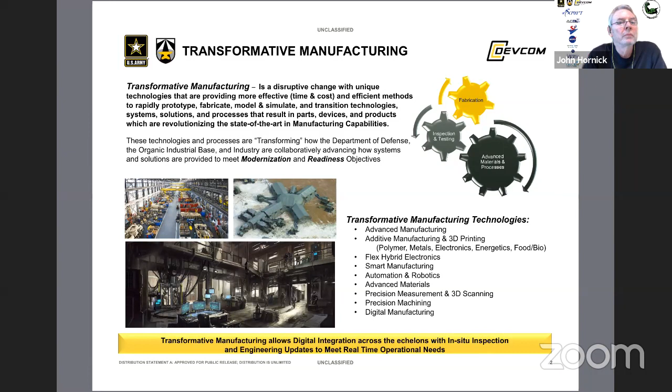So the Army, under the Army Futures Command, has what they call the 31+3, but basically 31 signature efforts, and transformative manufacturing touches upon all these major programs. It's how the Army is really going to get itself to the future level. By transforming all these technologies and using these new advanced manufacturing approaches, we can enhance and enable technologies to meet these priorities. It's up to us, DoD, industry, and academia, to work together, use best practices, and bring the Army prepared for the future battles.

At the Armament Center, we have full advanced research all the way through demilitarization, so full life cycle responsibility, from design to testing, qualification, certification, the whole aspect. And we work on 4 of the 5 major AM domains: printed electronics, metals, polymers, energetics, and the other domain is chem bio food. But 4 of those domains are done at the Armament Center, and truly integrating and using hybrid manufacturing techniques to integrate electronics to make 3D electronics into structures is one of the main areas we're really focusing on.

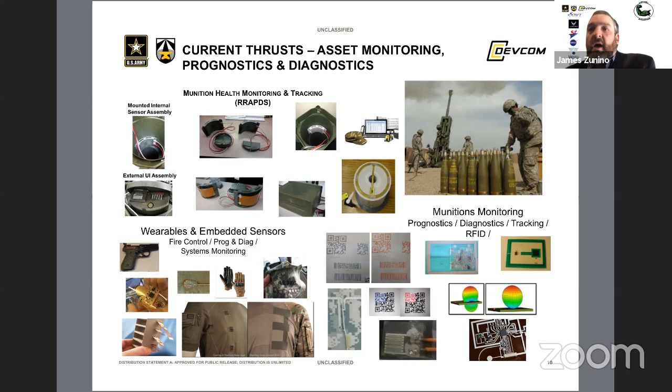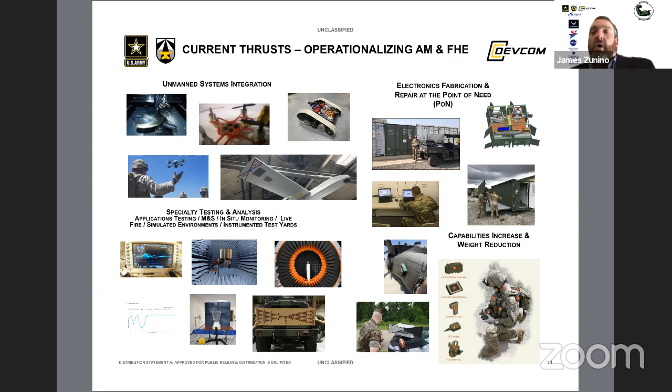One thing we're always doing at the Army's Futures Command, and especially at CCDC Armament Center, is we're looking for strategic partners, transitioning ideas, getting ideas from industry and academia, and enabling this acceleration and transition. We have a lot of active cooperative research and development agreements, educational and partnership agreements, and we're constantly trying to work together to build the best thing and really be a whole family that takes all these manufacturing technologies across the US and integrates them for DoD applications.

In summary, through manufacturing, advanced capabilities can be added to our current systems. Until we can print everything, hybrid fabrication is required. A lot of us say print what you can, place what you can't. By partnering in transition with the other services and OIB, we can support our warfighters at home and abroad.

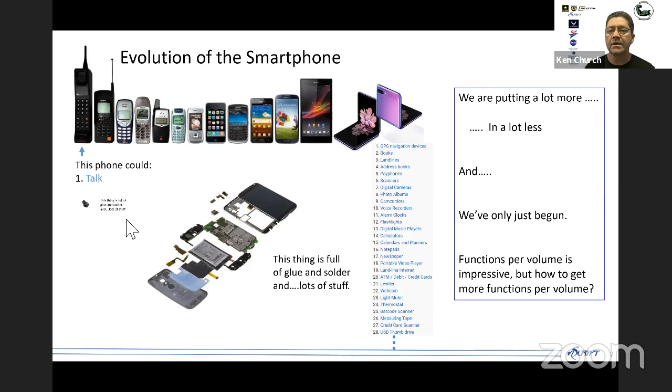And then if you look at the bullet points over to the left hand over here, you see that little bullet point - that's not a bullet point, that's an earbud. And this earbud does what this thing does. It talks, and so you can listen. And this is also full of glue and solder and lots of stuff, but just at a much, much smaller scale. And that's really where it went. So electronics is going to a much, much smaller scale.

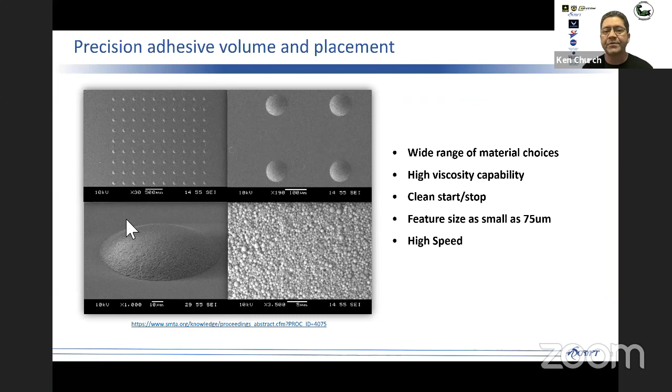And this is where precision really became important. So as electronics today, where does printing happen today? Well, it happens right here in printed adhesives. That's an important concept to get a hold of. It happens in printed solders, also important.

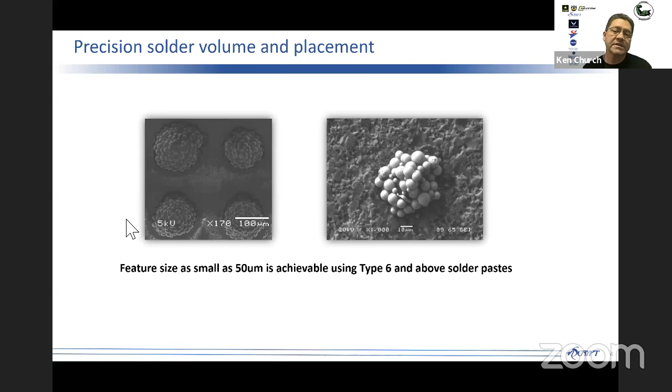So what you want to do is make those smaller. The printed adhesives, you can see those are less than 100 micron dots, and you want that consistent. Printed solder, again, less than 100 micron dots, and you want that consistent.

And then it's moved to printed antennas. Printed antennas are interesting, and most people are familiar with LDS, laser direct structuring. You have a special plastic, and wherever you pattern with that laser, you then go back and electroplate that copper pattern on.

The advantage of printing, on the other hand, has a couple. One, you can now change substrates. Whatever substrate you want to do, you can then print on, and that gives you some advantages, but it also can give you an advantage in cost. So printed antennas are also moving in a direction and becoming very real as well.

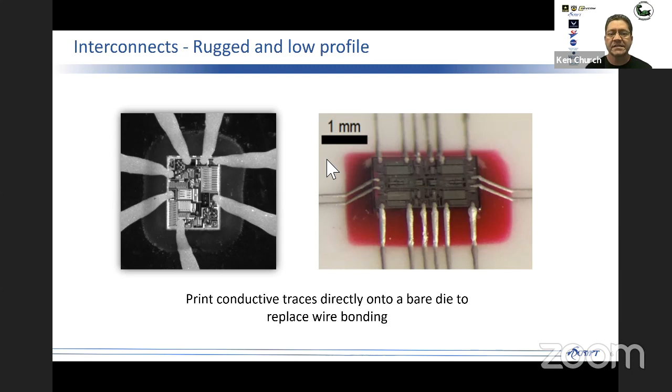And then also moving toward printed conductors, and the printed conductors become very important as they start doing such things as printing directly to the pads of bare die. The idea behind that, and this is happening today, is it's low profile, but it's also a more rugged approach. So this has some benefactors in that as well.

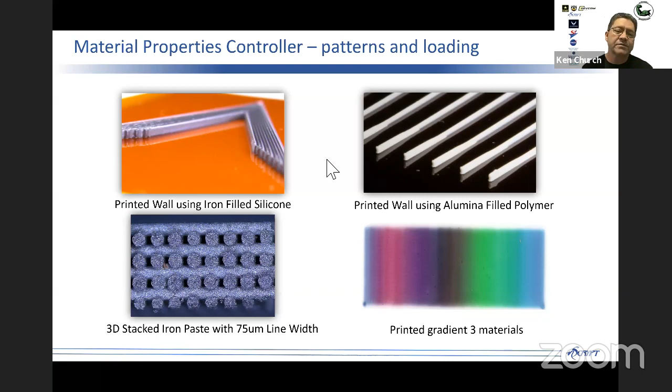So what can we do with this? That's what's really interesting. We can do some loading on the materials through nano and micro, or we can also change material properties through macro and milli patterning. And that is also sort of a 3D process.

And where does it lead to? Via filling, printed resistors, sensors, antennas, a doubly curved surface. And doubly curved to me is like a basketball. That is doubly curved, a half a basketball.

A cylinder is a tube, but topographical printing, I'm not talking about maps. I'm really talking about whatever you're printing on has some sharp dips and valleys and peaks. And how do I get electronics on that? The only way we do that today is through printing. So we have that advantage.

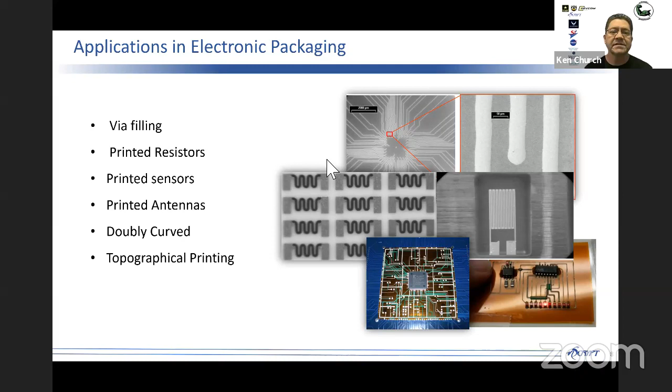So we have a toolbox of things, and those toolboxes of materials and material placement are important. And this is how we do it. We take a bunch of these devices, these tools, from micro dispensing to 3D printing, pick and place, precision, and we put those all on a single tool plate. We called this the pentahead.

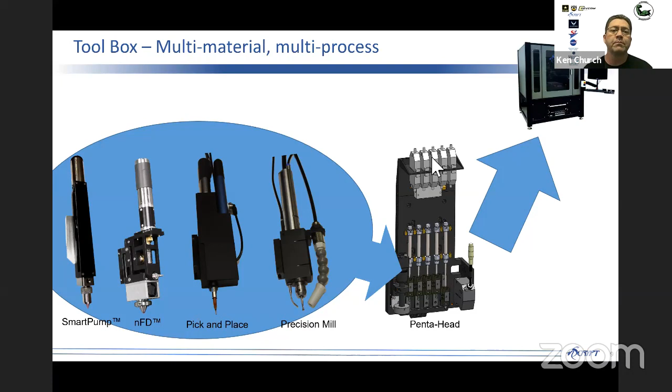And then we put this inside a single system. That system then allowed us to do multi-material, multi-process. So now our toolbox is becoming full. And what can we do with the toolbox?

Well, as we print, one of the things we should do is pay very close attention to what we're printing. I want to give a shout out to NASA here. NASA had the idea that the people on the space station were kind of busy and didn't have time to print, reprint. When you print 1,000 layers and a layer goes bad, they wanted to know what happens in each layer. So layer by layer, we can print, scan, and get a full report on every layer.

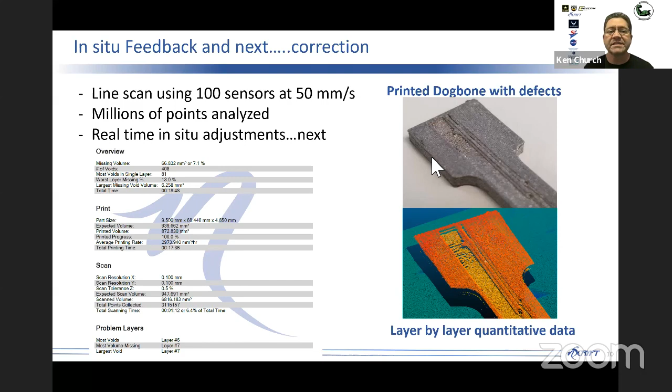This is very important, the next step of really where manufacturing is going to happen. And sort of the next step after that is print, scan, and then repair. That's going to be very interesting.

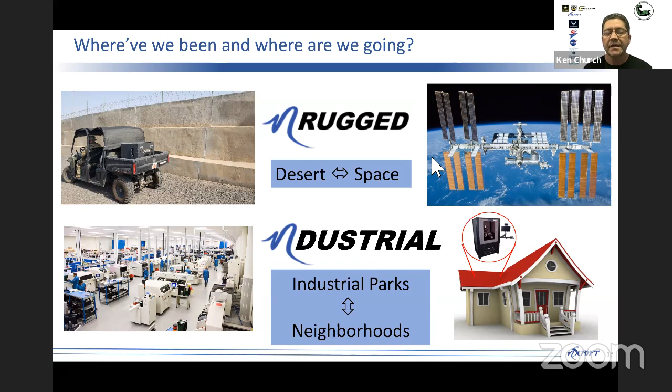So where are we at? We're in industrial parks today. Where are we going? We think we're going to neighborhoods. How real is that going to be? What a super great question, but that is the intent. So when we start looking at our partners at NASA, Air Force, Army, DARPA, all of those people, these are the people who are moving and shaking things and getting us out into places where electronics does not currently exist.

Here's where I'd really like to look, because people always ask this. They say, where exactly are we and where are we going to be in 5 years, and where are we going to be in 10 years? I like to look at it this way. You know, we have a list of things, but today, I have a pair of these Oakleys and...

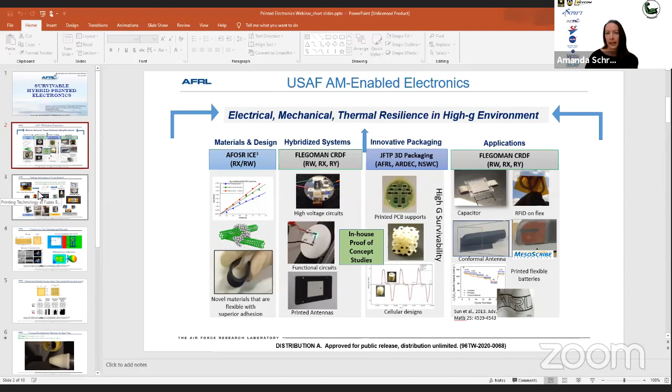As Ken said and everyone else, printed antennas has been a pretty popular area, as well as just different ways to replace potting in more elegant ways, more sophisticated or complex designs through 3D printing the structures. So we'll title that Innovative Packaging. And then the final section is more towards the applications. Just to give you a few examples, we've worked in FLEGOMAN on a printed capacitor, some different RFIDs, flexible or other printed antennas that have actually been implemented on the Reaper. Here's another example of flexible. So we don't necessarily work on flexible, but conformal is one area, and you'll see some examples of that later.

I wanted to give you a preview of what printing technology is in our lab and where we intend to go by the end of the talk. We do have traditional circuit board printing software, we use a lot of SolidWorks and Autodesk as far as our software goes. And we have some plastic printers, we don't use those a whole lot for our electronics, it's more form and fit check and prototyping, but we have a MakerBot and a Formlabs. The primary machine that we use is what Ken just described from his company, the nScrypt. So the majority of our talk will be how we've outfitted and are using the nScrypt.

We have a larger scale printer called the Beast. We had a Voxel 8, which is no longer being sold - that company's out of business. And a high temperature printer that we haven't set up yet for polyether ether ketone, otherwise known as PEEK, a high temperature polymer, and a lot of other accessories. So the lab's grown and we continue to outfit our nScrypt.

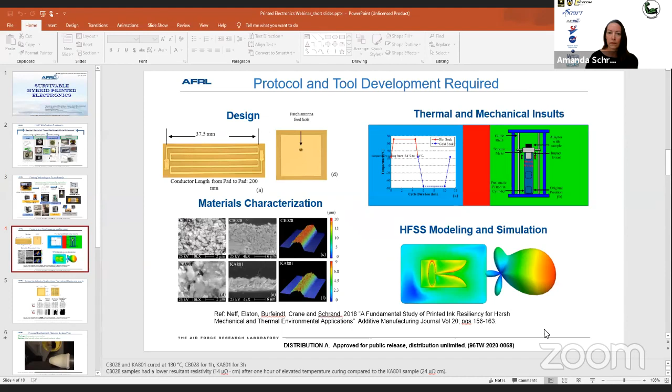This is one of our early papers, and I wanted to toss this out there because design and testing go hand in hand. You really can't understand your results unless you focus on why you chose your designs. So we have designs for electrical testing, designs for antenna testing, and you'll notice both of those are flat, planar - that's just a way for us to start our lab testing, looking at thermal cycling and high impact characterization.

And we've moved to this antenna design called a Vivaldi, and that's what you'll see in the following studies, is that translated onto a conformal surface, not just the planar. So here's the reference for that paper.

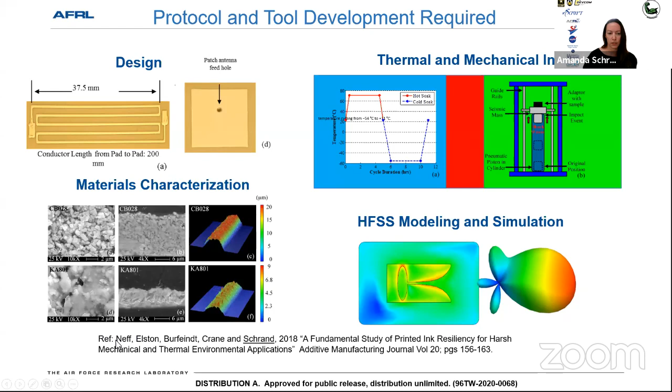It's in the Journal of Additive Manufacturing. My postdoc Clayton was the first author on that. And this is another slide from that same paper.

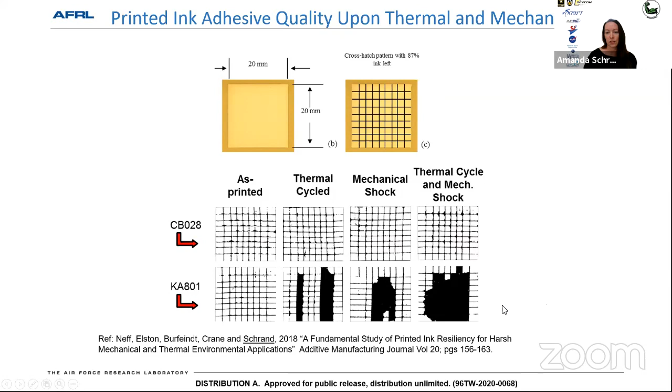So we developed some scratch testing studies. Again, if the materials don't adhere well on a planar substrate, they're likely not to survive - it's a primary factor for surviving the high G impact. So what we found here is we compared two different DuPont inks, and we saw the second one was not as survivable as the CB028.

Since that study, we've implemented quite a different variety of tools into our nScrypt. At one point, we implemented a lathing tool with a vacuum. So what you see on this video is basically a way to smooth the complex surface of this radome before we print on it. There's many other things that need to be done before we use this very sensitive ceramic tip for microdispensing in the nScrypt.

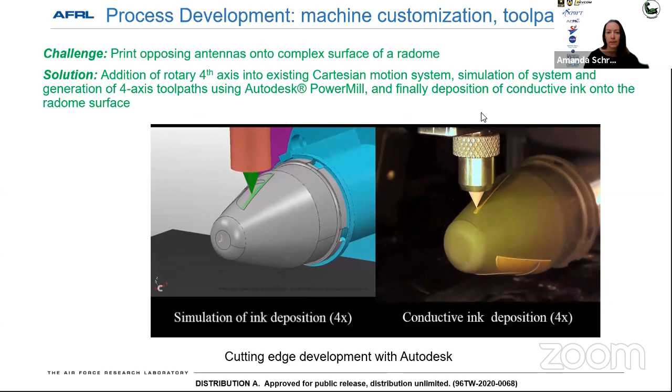So this was one step that we had, and then we started working with Autodesk to basically do the 3D simulation of the printing of that Vivaldi antenna. There's dual Vivaldis, you'll see one on each side. But one modification we made to the printer was to add a rotary stage, so basically that enables the software in the printer to rotate this radome to print on both sides of it.

But I do want to say that because this is injection molded, the surface irregularities required quite a bit of pre-processing before we did that print. And this is with the CB028 ink. So a really nice way to simulate and model the print before actually performing the operation. So I'll let this finish, but again, a great collaboration with Autodesk.

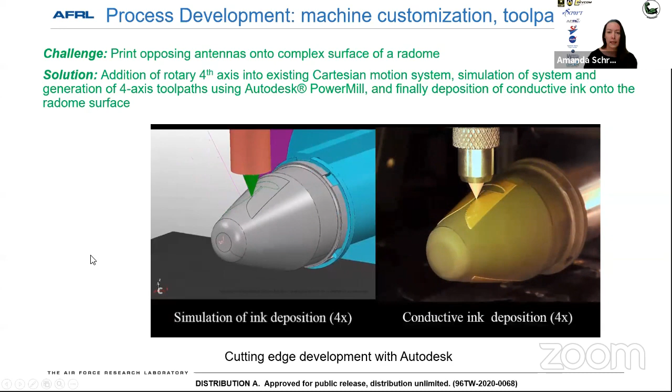And we've recently moved on to aerosol jet printing. We have an IDS printhead in our nScrypt. The reason for this is that we can get a very focused beam of material, but we can have a greater standoff distance, so that we're not so sensitive to the ceramic tip potentially hitting the surface and cracking or causing other issues. So this is installed in our system.

In the future, we will plan to add one of these to a 5-axis robotic arm. So I have some future slides, but one thing about the aerosol jet I'll just mention is that it's a very thin layer of materials. So we're still looking for, going back to those testing and designs, how to measure that appropriately for conductivity and other adhesion measurements with such a thin layer.

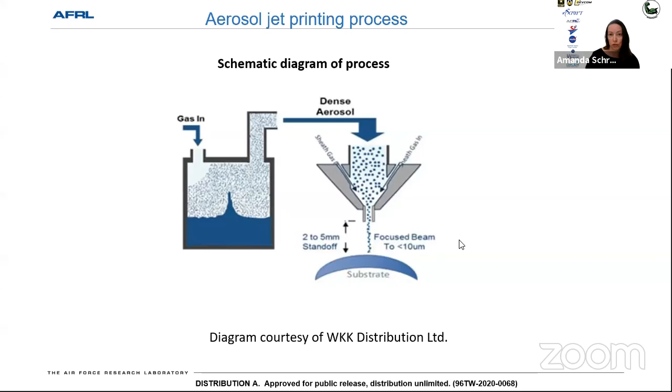How many layers should we make? What's the optimal thickness and things like that?

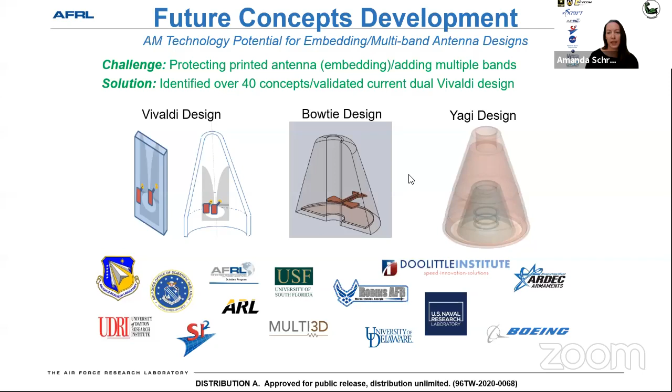So I'll just toss that out there - in April we'll be doing a technology sprint on some dielectric materials for embedded electronics. And as I mentioned earlier, we're looking into the robotic arm. So we're working with Georgia Tech and the Navy to implement some AI-based materials knowledge on our printed electronics into basically a 24/7 lab of the future.

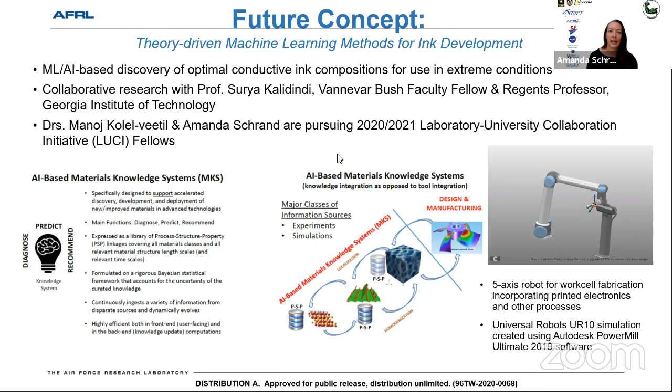So again, just toss out a few future ideas and kind of where we're at. And again, I appreciate everyone joining in and look forward to connecting. I'm sure you'll have a way to connect with all of us, and that's what I have for today.

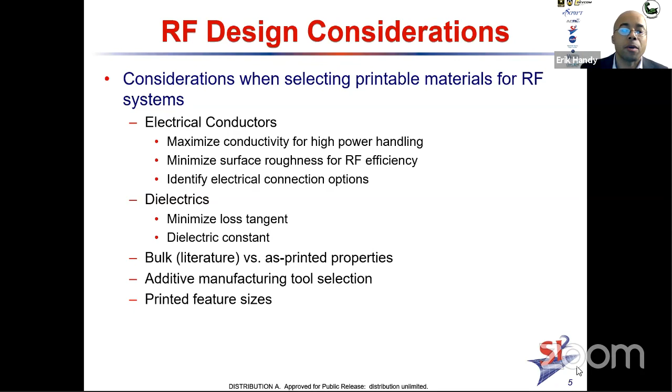A few more thoughts on material selection and process selection. We need to account for temperature mismatches that might be present in the material choices we make when combining materials. Are the temperatures needed for sintering conductive inks compatible with the substrates we'll be printing onto, and vice versa? I'll show a slide momentarily where we go back and forth between dielectrics and conductors.

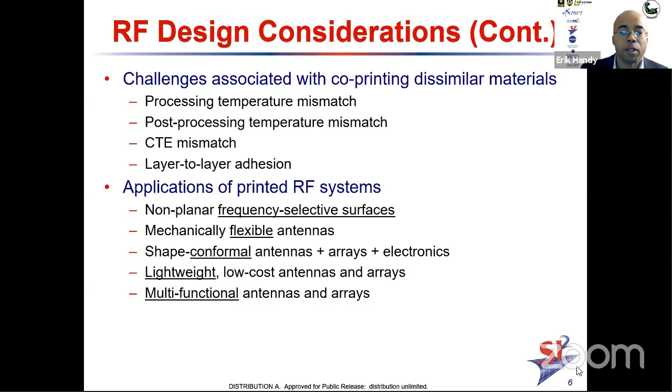When we do this well, a number of applications present themselves. We can look at shape conformal antennas that follow the contours of the part. Ken earlier showed helmets with antennas printed on them. We also think about aerospace structures - do we have an antenna that conforms to the shape of a wing, for example, or multifunctional antennas that serve several roles, playing an RF role but perhaps another role as well. There may be benefits that accrue to the platform by using multifunctional parts. Here's one example: we've also done some work with Vivaldi arrays, also known as notch arrays.

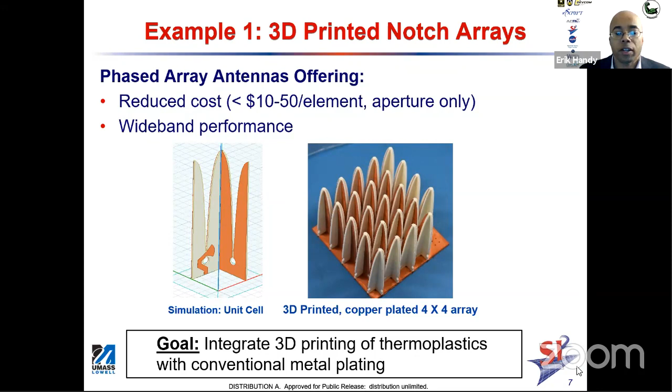So our thinking was, using 3D printing, can we grow that structure from the ground up rather than getting in there with our hands to slot individual circuit cards together - stitching them together electrically but making sure they have the right geometry? Can we grow that structure? And then, to keep costs down, can we selectively metallize that structure using conventional plating? So it's a merger of 3D printing for the dielectric and conventional plating - hopefully the best of both worlds.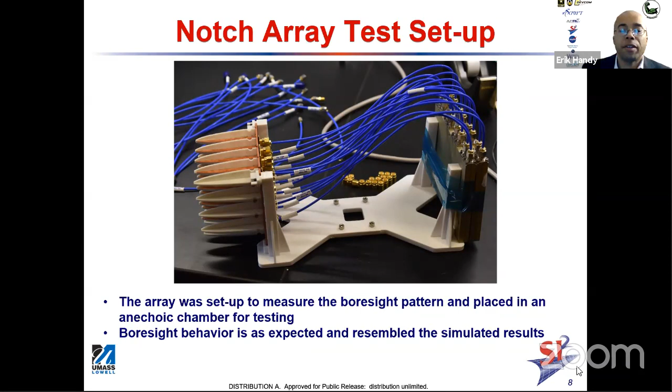Onto a second example, switching gears a little now. This is a planar phased array antenna. As I'll show in a slide or two, we also looked at a 4x4 array here. The challenge was we had funding from the Air Force to look at space-based applications, so we needed to be 3D printing parts with space-compatible materials, and we also needed to co-print dissimilar materials, as I discussed a slide or two ago.

So, thermoplastics and dielectrics - we didn't have the benefit of a plating process, so we needed to co-print different materials that make different demands on the printing process and have different post-processing requirements. Adding to the fun, the parts needed to be multifunctional - we needed an array that would serve several roles and reduce cost, schedule, and mass, saving space on board the vehicle, which is always a requirement. Mass is always a challenge.

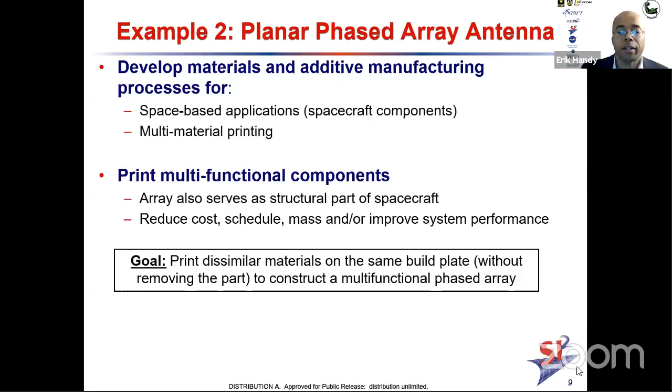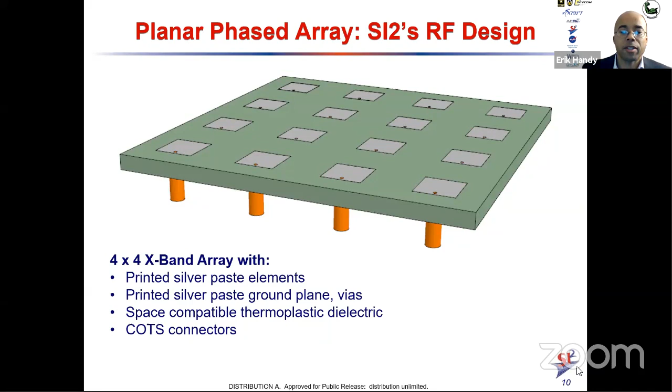That structure is then ready for drilling vias down to the buried patches and attaching COTS connectors. So we show we can grow up this whole structure, like the Vivaldi, without touching the part, just going back and forth between dissimilar materials. We take the array into the chamber and see performance that aligns very nicely with simulations.

Obviously some deltas there, but we think we have a reasonable handle on what's going on there.

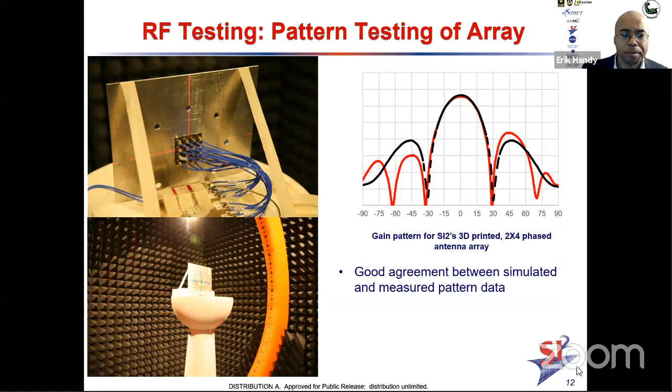So in conclusion, just to wrap up, we're showing that 3D printing can enable antennas that play a multifunctional role. They can support load bearing roles on a spacecraft, for example, taking up some of the structural demands of the vehicle, as well as performing an RF sense. And then as needed, we can look at combining 3D printing with conventional manufacturing to maximize design flexibility afforded by 3D printing and the performance afforded by conventional processing.

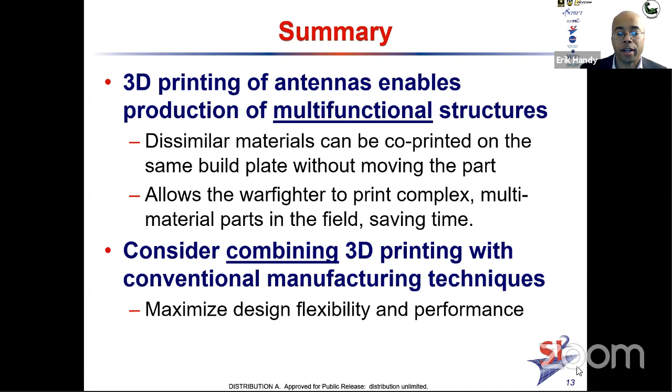So just to wrap up, I just want to thank the Air Force for the funding, particularly on the planar array work, those spacecraft arrays, and the ONR and our collaborators at University of Massachusetts at Lowell for the work on the notch arrays. And thanks for your time.

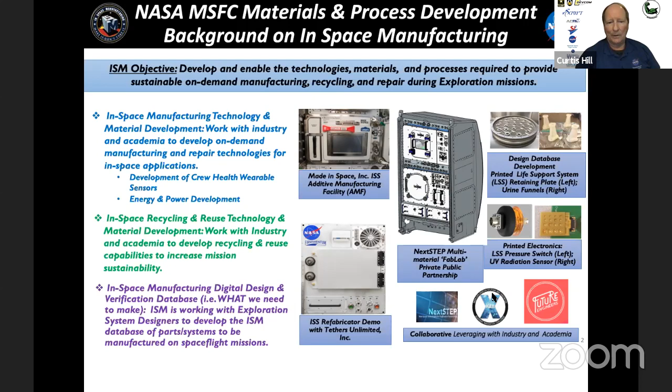In terms of our electronics development, our effort is a multi-NASA center development. It includes 3 or 4 of the NASA centers. It includes some outside companies and probably 10 to 12 different academic institutions. And I'll show you some of that as we go through here.

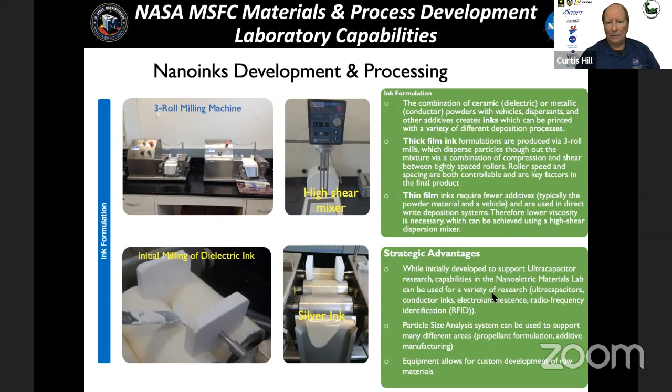So we do some in-house development, particularly on inks. We have the capability of developing our own inks for thick film, for thin film, in a variety of different functional elements. Multi-material printers, we've got, of course, the nScrypt. And our nScrypt we're using sort of as a test bed for the development of our Fab Lab capability later for the space station. We swap heads in and out like the extrusion printing for inks, we're going to add a thin film inkjet capability to it. We have a laser sintering capability. We have an end milling capability. So we use it as an evaluation test bed for the processes that we're going to eventually fly on the space station.

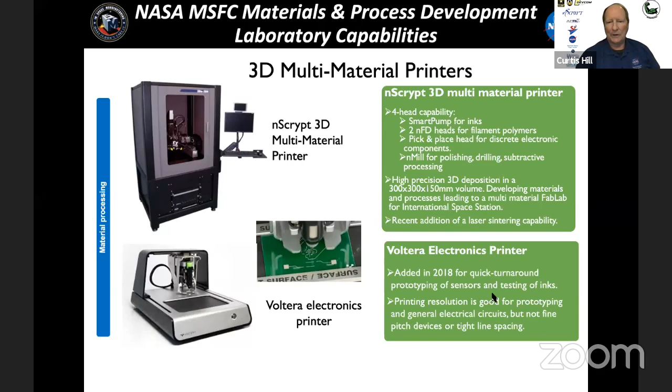In terms of actual tech demos, our demo that we're working on for 2024 is the printing of flexible sensors. And those are going to be different types of sensors. In general, they're going to be for the monitoring of the space station environment and for the astronaut crew health monitoring. And so associated with our process development of 3D printing for the station, we're developing a variety of materials and processes for these printed sensors.

And you'll see, related to that specifically, we're looking at things like solid state humidity sensors from the dielectric materials that were developed, strain sensors that are 3D printable, new component technologies where you can take an integrated circuit die and trim it down and print it on a flexible substrate, having a completely flexible sensing device.

Structural health monitoring applications could be things like stress sensors for impacts on the station, or things as simple as temperature sensing. And then biosensors for crew health—I'll say more about that when we get there. This year we have a specific project developing a tech demo that will essentially be a wearable for astronauts for crew health monitoring.

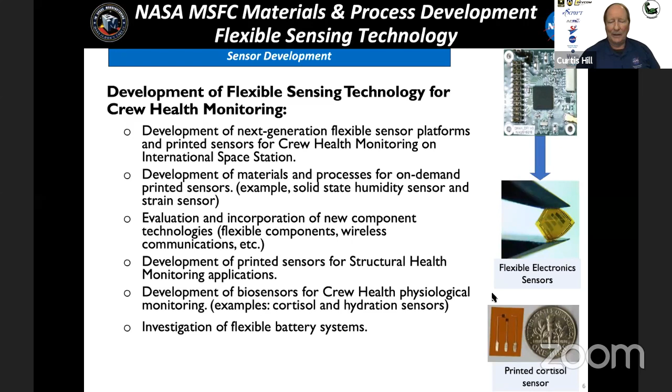Wearable sensors—this is a module on the space station right now. Currently we're using on-station wireless communications, an RFID network for logistics reduction or tracking, an RFID inventory control system for a lot of things already on the station. And we're going to eventually take advantage of that RFID wireless network for communications and power harvesting for our wearable sensors.

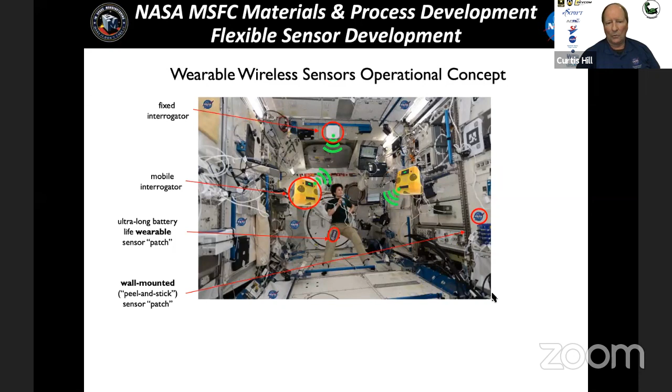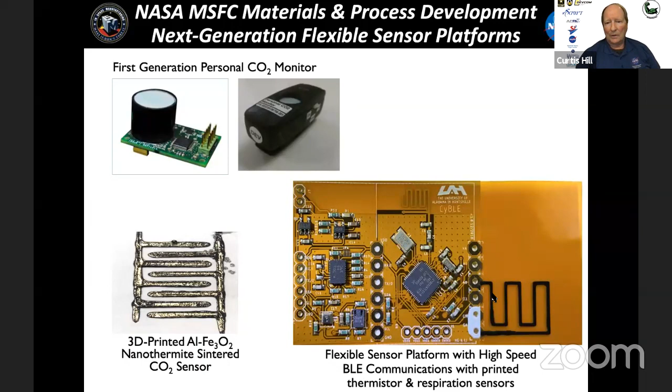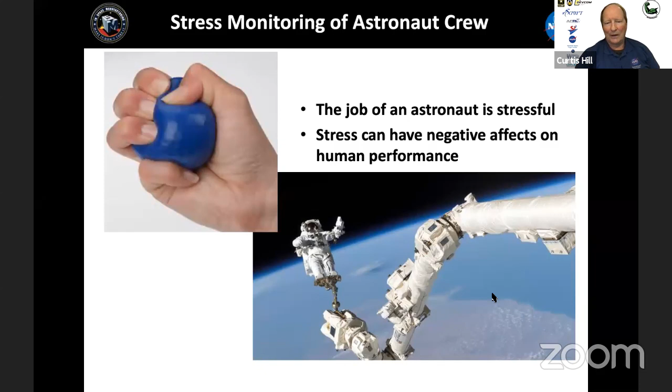Obviously if you're an astronaut you're under stress, and one of the things the flight surgeons told us is they want us to develop a capability to monitor that stress. So we're developing a 3D printable cortisol biosensor. This is some of the science behind it—I'll show you the project we're doing it with in a moment. We're also developing a humidity respiration sensor so that as you breathe on it, the moisture in your breath is very accurately tracked.

I want to talk a little about our AstroSense project as I'm closing here. We're working with NextFlex on development of a wearable device that will eventually be our tech demo to print on station. That's a peel-and-stick wearable device with different printed sensors on it, but the important one is a printed cortisol sensor—a sweat-based sensor that comes in contact with your skin. The wireless communication we'll use is ultra-low power RFID wireless, which we already have infrastructure in place for on the ISS.

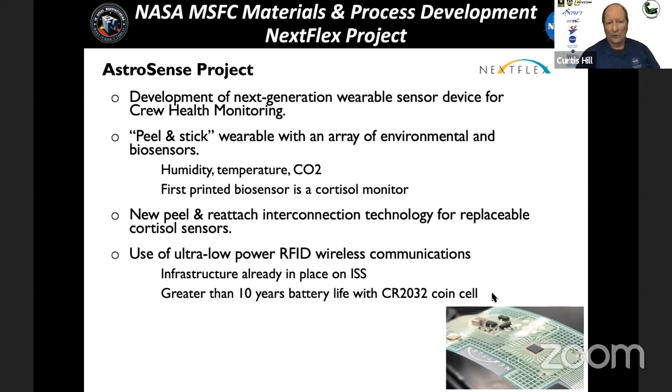We can get 10-year battery life without having to change the battery because of the low power of RFID. And this also gives us a platform to integrate our power generation and energy storage devices on later generations of these devices.

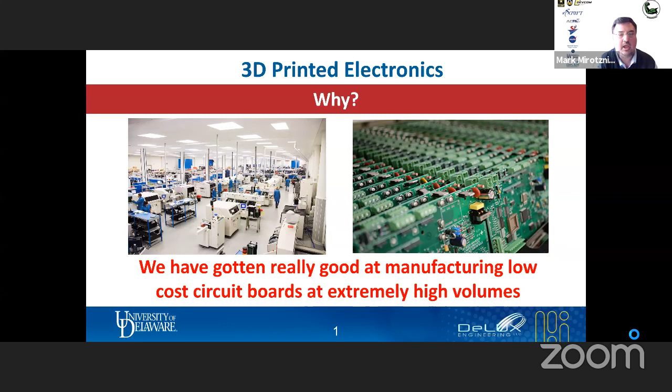We've gotten really good at manufacturing low-cost circuit boards at really high volumes. There's a number of niche areas we've been working on, particularly for small volume, labor-intensive parts or systems, where you could save lots of money and labor through automated assembly. Others have talked about point-of-need manufacturing, for example up in space or at forward operating bases, places where it's hard to get things sent to you. But our real interest at the university, as a research facility, is to build things that there's no other way to do, so we've really been focusing on over-the-horizon kinds of applications.

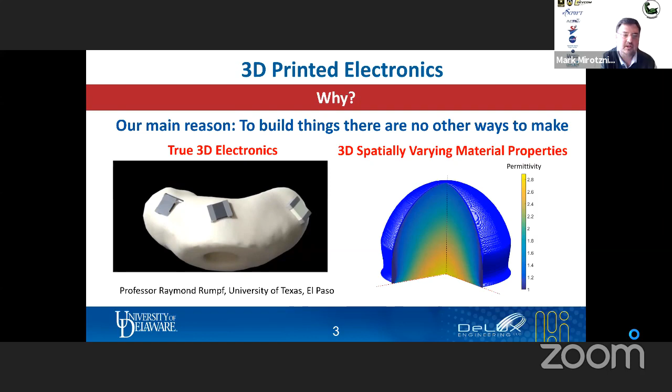The other image on the right is another idea: what could you do if you could vary the material properties of either the substrate or some element arbitrarily in 3 dimensions? Neither of these two ideas have really been explored much in the literature simply because they weren't possible to make. Now with additive manufacturing, we can realize some of these ideas, and they're outstanding research topics.

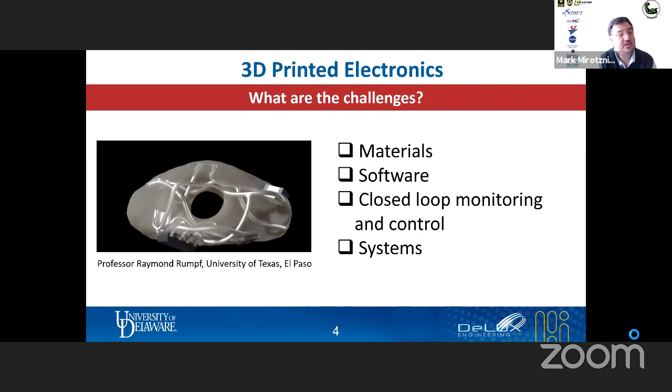I do want to talk a little bit about the challenges I see in getting to this level, and what we're working on. There are really 4 of them. The biggest bottleneck we've encountered is on the material side.

Doing functional electromagnetic devices at very high frequency, we want to get up to W-band, 110 gigahertz if we can, but certainly up to 30, 40 gigahertz. There's a big problem in getting the right materials. For example, the electrical conductivity of the inks or pastes we can print is usually an order of magnitude below bulk properties, and progressively gets worse at high frequencies. We'd love to have printable thermoplastics and resins, inks and pastes with a range of electrical, dielectric, or magnetic properties. We'd like to print high temperature substrates that can stand soldering or handle extreme environments. There's a lot of work that needs to be done on developing these materials.

The other big issue with us is simply software. Circuit board analysis and layout design was meant for single or multi-level flat boards on a single material substrate, FR4. But we really want to be able to lay out boards in 3 dimensions and place electronics anywhere we want. The software just simply doesn't exist to do that. And even if it did and could produce a Gerber file that could go into these general 3-dimensional layouts, we'd then have to convert that to run a multi-material AM system, which might combine multiple manufacturing tools. And lastly, how do we go from 2.5D layer-by-layer manufacturing to true 3-dimensional printing? I think there's been a lot of advances in this area. Professor Rumpf, for example, is developing software right now for 3D circuit layout. I know nScrypt has made some strides, but there's a lot of work that needs to be done on the software side.

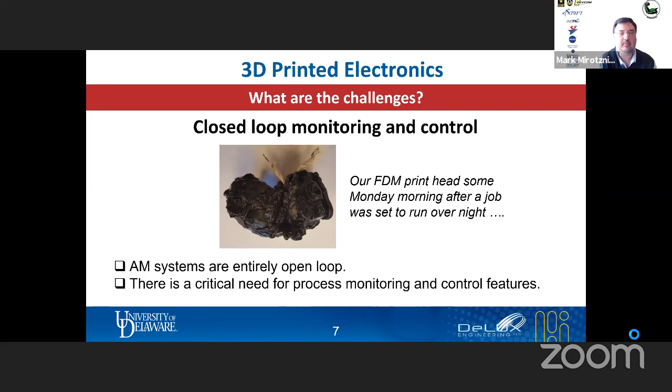And lastly, systems. A lot of the cool 3D electronic systems I've seen printed are actually done on a range of different machines. And if you talk to the folks that make them, there's generally some manual assembly involved. They're moving the part from machine to machine to print substrates or metallic elements, or to integrate electronics. This can lead to all sorts of problems, including high fabrication times and failure due to registration errors. It's really not possible to use that approach to do complex 3D integrated electronics where everything is integrated into a single package. So what's really needed, as someone else mentioned before, is a Swiss Army knife approach: a single machine that combines a multitude of different printing modalities and materials together.

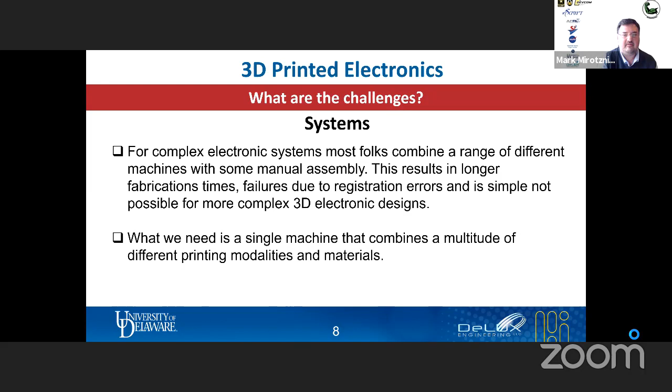So I'm going to switch gears and talk a little about what we have and use at the University of Delaware. We are big fans of nScrypt, and they didn't pay me to say this. We have 2 machines right now, the tabletop and a 3Dn-300, with a range of gizmos. The reason we like nScrypt is that they're the closest to this Swiss Army knife approach of any machines out there. They have an open architecture that allows you to add your own features. So on our particular nScrypt, we have a range of gizmos: smart pumps that print our own as well as commercial inks and pastes; FDM of thermoplastics, where we print commercial thermoplastics and also make our own filaments loaded for high or low permittivity or magnetic properties; pick and place for electronics; a micro milling attachment for smoothing surfaces, getting surface roughness down to a few microns; and a couple of custom heads we've integrated. We've built our own hopper-fed system, so for highly loaded polymers that are too brittle to make filament, we do pellet printing and can integrate that directly with the nScrypt. And lastly, we just purchased an IDS aerosol print head, which we'll integrate — and I saw the Air Force has already done that.

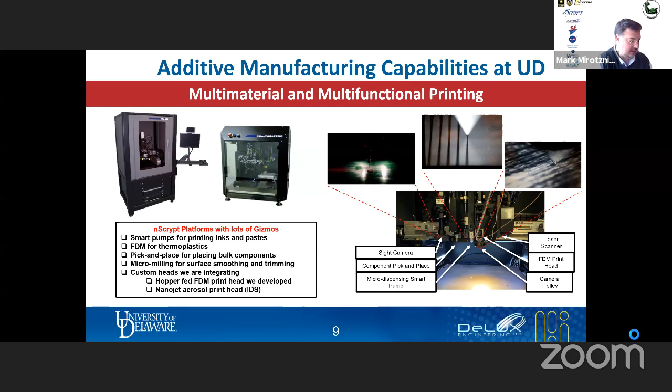Soon, next month, we'll actually get our 3rd nScrypt, which is a 6-axis superscript, which we're really excited about. We'll be able to get away from pure 2.5D printing and do true 3-dimensional conformal printing.

This is the laboratory. We built, I think, a pretty state-of-the-art laboratory for printed electronics. We have a range of multi-material and high-temperature polymers, ceramic printers, and a range of material development tools for making our own thermoplastic filaments, as well as other inks and pastes.

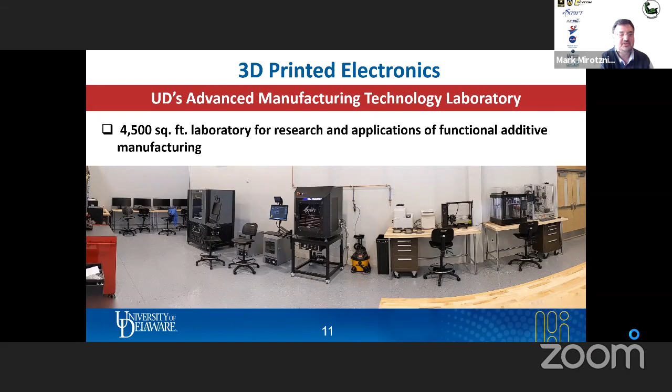This shows a few of the applications we've been working on. Our interest is really high-frequency electronics for most things. All of these devices work up to 18 gigahertz, and we've done everything from fully automated printed assemblies to conformal printed antennas. One of the things I think we're most proud of is that we've made printed RF connectors.

I've seen a lot of designs like the one on the far left, where you have this beautiful 3D printed circuit and you have to snap on a COTS connector to it. We actually can make our own snap-on SMP connectors as well as threaded SMA connectors, and we've tested them up to 18 gigahertz and they work great.

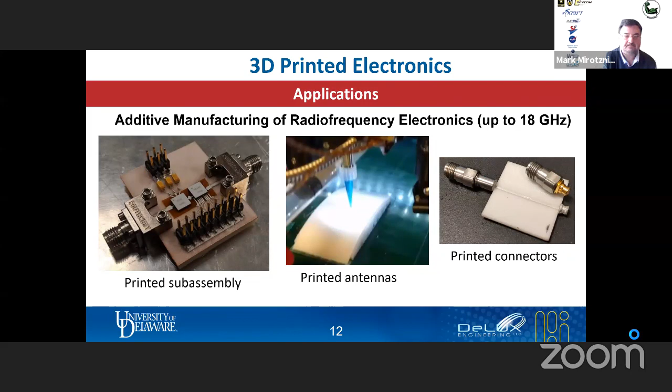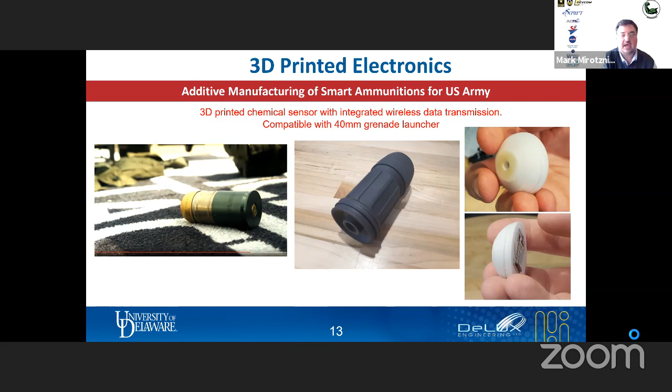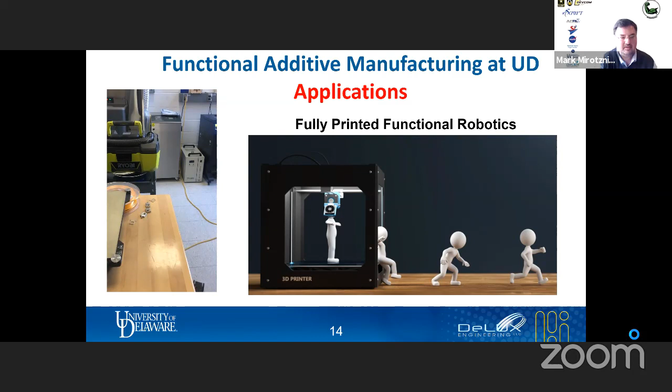Here's a kind of a cute project that we're working on for the Army, where they want fully printed functional robotics. The idea is the thing on the right, where you print a robot and on its way out of the build plate, it pushes the button to print the next robot. We're not quite there, but we can actually print some movable structures. We pick and place and integrate all the servo mechanisms, and the thing can push itself off the build plate and then move around the floor. You can see it on the bottom right, left there.

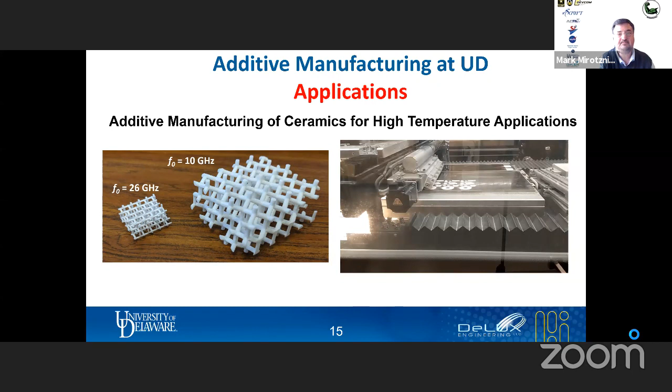So the integration of ceramics inside other additive manufacturing gives you really a large amount of flexibility to do 3D printing in extreme environments. And here's the last example I'll talk about.

We've been working on methods of using additive manufacturing for communications. There's passive or beam steering used in a range of different applications, from radar systems to satellite communications, and more recently at the high frequency 5G communications, you need some sort of beam steering at up to 30 gigahertz. So the two ways it's normally done are active phased arrays, which are very expensive, or mechanical steering a dish, which is too slow and heavy.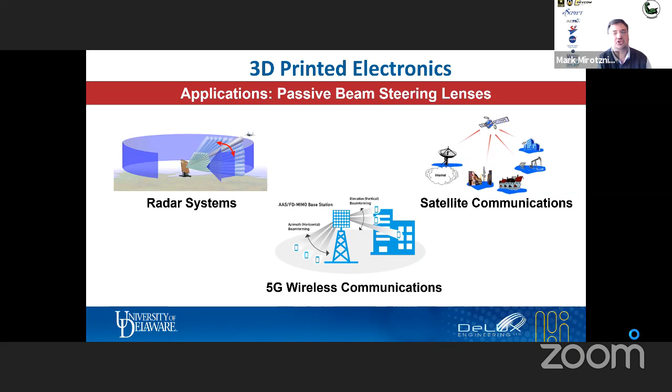So a third alternative is actually this idea of passive beam forming, being able to make a dielectric lens that can take a source and move it in different directions based on its location. Instead of having a full phased array, you could just have an array of sources and a switching matrix that switches behind them. A far cheaper idea. This technology has been known for a long time, but the way of making these spatially varying structures has not been known. The dielectric constant in these lenses needs to vary continuously in 3 dimensions.

Hey Mark, you're just about up. Okay, I'm done? Just one more minute.

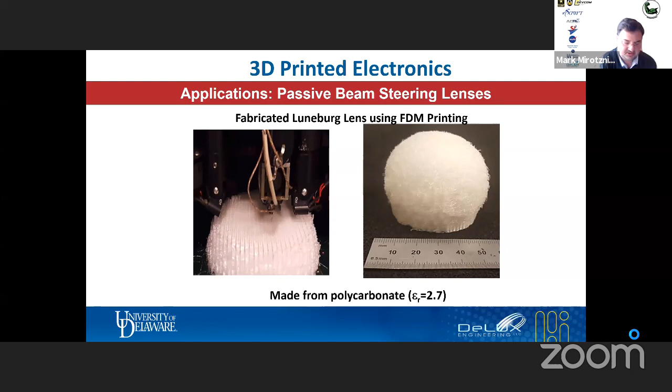One more minute, great. This shows the idea of fabricating these beam steering elements totally out of polycarbonate. So the material cost is less than $1.

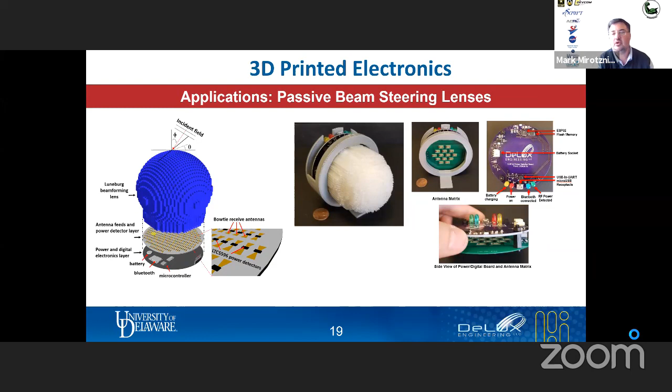And then we work with a company called DeLUX Engineering, which we'll talk about next, about integrating this into a product where we have 3D printed lenses on top of an array of bow tie antennas and all the switching matrix. So we can do full active beam steering on a device that costs, instead of hundreds of thousands of dollars, hundreds of dollars.

So let me end there by thanking all the people that are actually doing the work, as well as our sponsors who are paying for it.

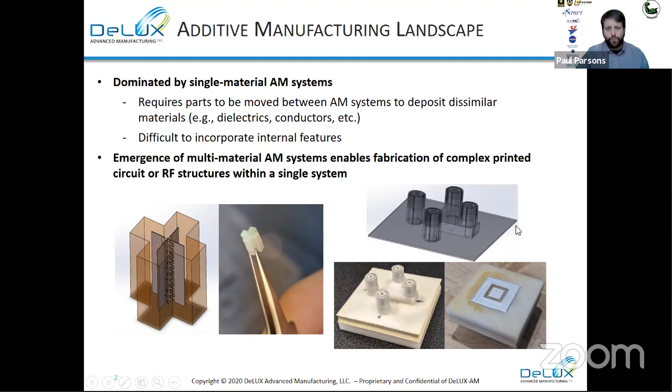Working with the heart of the panel itself, where we're talking about replacing printed circuit boards entirely, my personal philosophy doesn't necessarily follow that, and it's actually very closely to what Mark describes of how we can produce very high volume, low cost printed circuit boards. However, there are needs when we need to take this printed circuit board and put it in a geometry that just doesn't really fit well. With the power of multi-material additive manufacturing, we can actually conform these sorts of structures to that available space.

And what I'm really going to be focusing on today is 4 topics: the simple printed circuits, the transmit and receiving components of these structures, how we get signals in and out of the structures, and of course, the materials development for these complex structures as well.

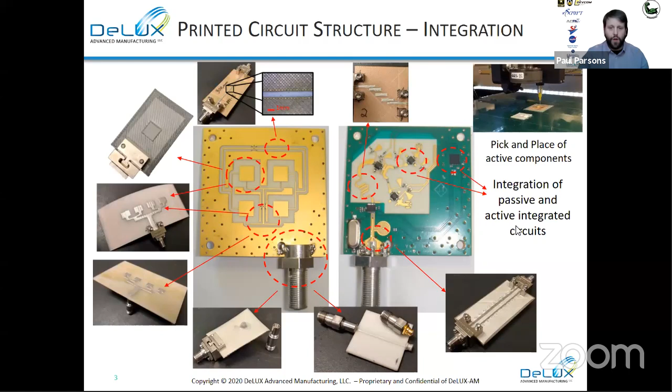For the first topic about the simple structures, this is actually one of our earlier prototypes for a printed chemical sensor. As you see, we can actually use the multi-material system, which I've neglected to mention is actually the nScrypt system over at the University of Delaware, to print the conductive traces, which we connect to various components that are pick and placed. Jim very succinctly put it as print what we can and place what we can't.

However, with the advent of multi-material printing, this actually allows us to put multiple layers of dissimilar materials, allowing us to slowly build up more functionality and to detect multiple gases at the same time.

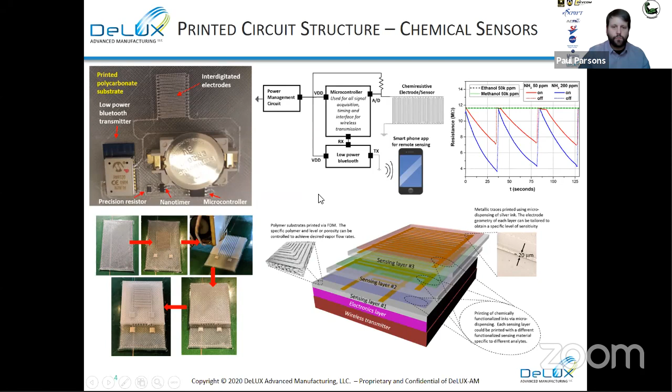And then when we start addressing the actual transmit and receiving components, we typically rely on printed antennas, which we can easily model using commercial finite element method software. We then print these designs using the nScrypts, where we can print the ground planes, the dielectrics, the conductive patches, and things like that.

And we're not necessarily limited to just planar geometries. We can also print conformal structures, and we're very, very excited to actually use the six-axis nScrypt that'll be arriving, coronavirus permitting, at the university for us to use.

The third topic I really want to bring up is probably one of the most important topics that's often overlooked: how do we get signals in and out of these printed structures? One of the most common failure modes is actually the interface between a connector and the printed structure itself.

Using this multi-material additive manufacturing technique, with a multi-material printer, we can seamlessly integrate connectors into various geometries that allow us to easily adapt and make compatible with other COTS connectors.

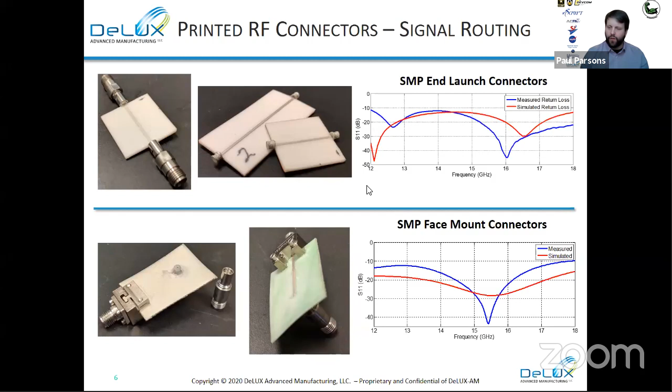This opens up a brand new avenue for how we do signal routing within these complex printed structures. We can use these connectors, integrating them into the structures, and build our own signal routing paths within them without relying on bulky connectors or solder or anything of that nature.

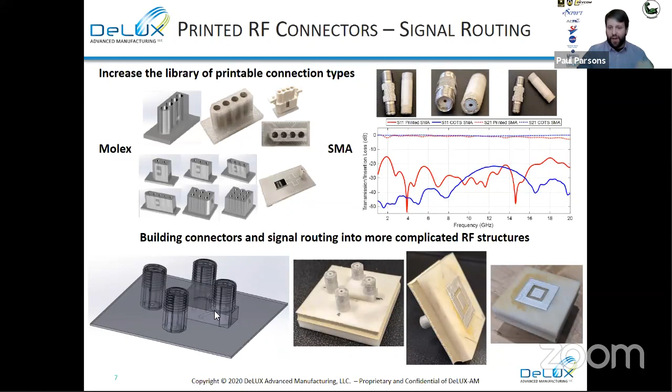These filaments vary very differently in both mechanical and thermal performance. However, the relative permittivity of these materials is actually remarkably similar. There are applications where we require a higher permittivity or even a lower permittivity, but those materials simply do not exist.

On the other hand, and probably the more important materials development process for RF applications, are the conductive materials themselves. We've looked at a lot of the commercially available printable inks and pastes at high frequency on a base Rogers board, and it turns out we're very limited in RF conductivity, especially as the frequency increases.

This can be attributed to the materials not being able to fully cure and sinter on these polymer substrates, because if you set the temperature high enough, the polymer substrates begin to warp, break down, and decompose altogether. We want to avoid that.

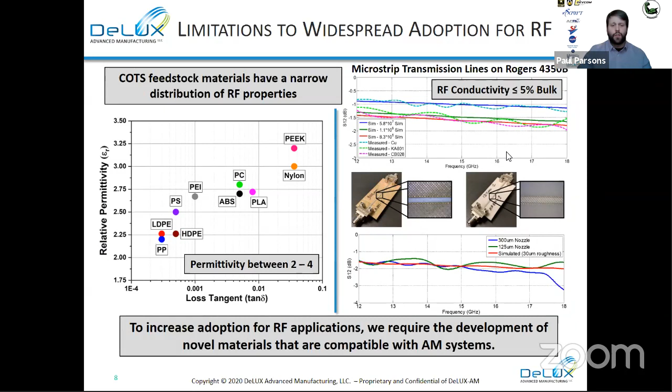So in order to increase the adoption of AM towards RF applications, we require the development of novel materials that are compatible with AM systems.

These composite filaments are created by introducing very specific inclusions at controlled volume fractions. Provided that these inclusions are very small compared to the incident wavelength, the effective properties of the composite are essentially a mixture of the properties of the polymer and the inclusions themselves.

Hey Paul, a little less than 2 minutes, okay buddy?

Got it. We can then use effective medium approximations to predict and engineer very specific dielectric or RF properties of these composite filaments by simply controlling the volume fraction. And with that, I'd like to conclude and wrap everything up.

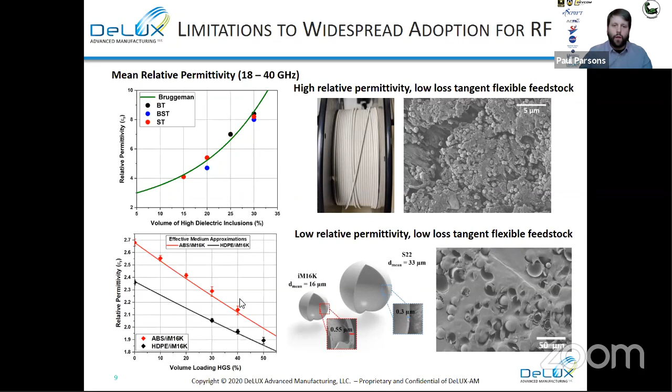Multi-material AM systems enable the fabrication of complex printed circuit and RF structures within a single system, and we're not necessarily constrained to relying completely on commercial connectorization techniques. This paradigm introduces new degrees of freedom in structure design.

Materials development is a very critical need, where we need to tailor the RF properties of various feedstocks, but more importantly, target increasing the RF conductivity for these applications. Lastly, I'd like to leave off with how we need to be cognizant of future needs, for instance in extreme environments such as high temperature, high Gs, and how to actually address these problems. Thank you.